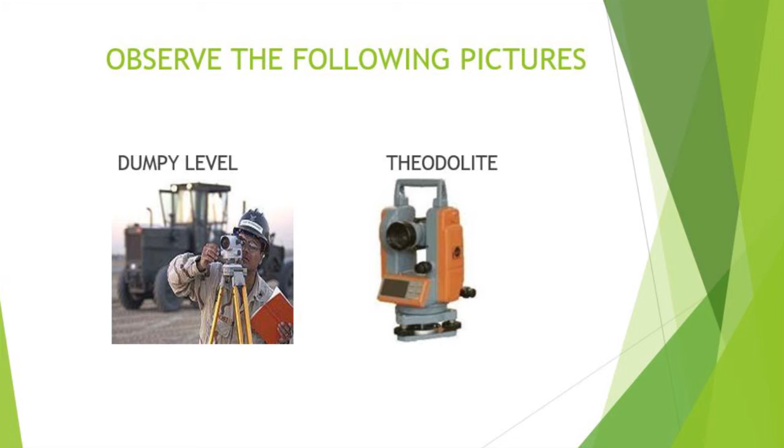Here there is a question to answer if you have observed well the picture. What have you seen on the picture? What is he doing? Can you guess the topic of today? Remember, we are in surveying instruments, but I need you to guess the topic of today according to the picture you have seen.

I give you a topic. Now the topic of today is using Dumpy level and Theodolite instruments as required in surveying operations. Remember, we are in surveying instruments, competence called operate surveying instruments. Learning unit 2: Use of surveying instruments, equipment, and tools. Learning outcome: use surveying instruments, equipment, materials, and tools.

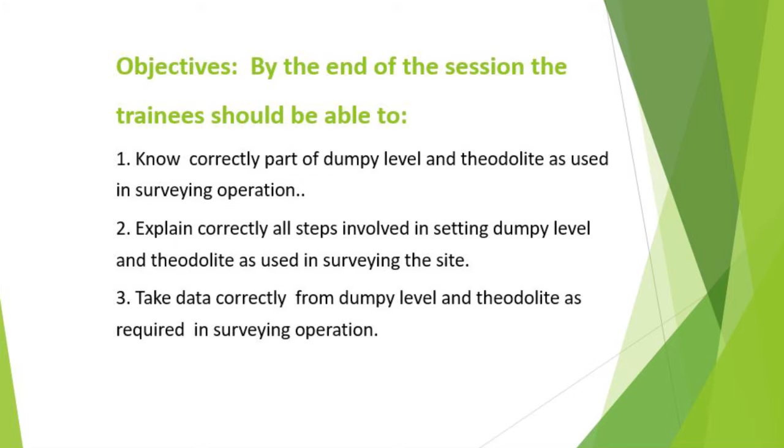Remember, in the first learning unit, we have seen more about surveying. What is surveying? We have seen that surveying is the art of determining the relative position of a point on, above, or beneath the earth's surface by means of direct or indirect measurement of distance, direction, and elevation. Remember, I have told you: distance, direction, and elevation.

Suppose that we have here an axis. This is the x-axis and the y-axis. It means on this there is a length here. This length is now a distance. And here there is what you call direction, either from here as north. So the direction here is different from the direction here.

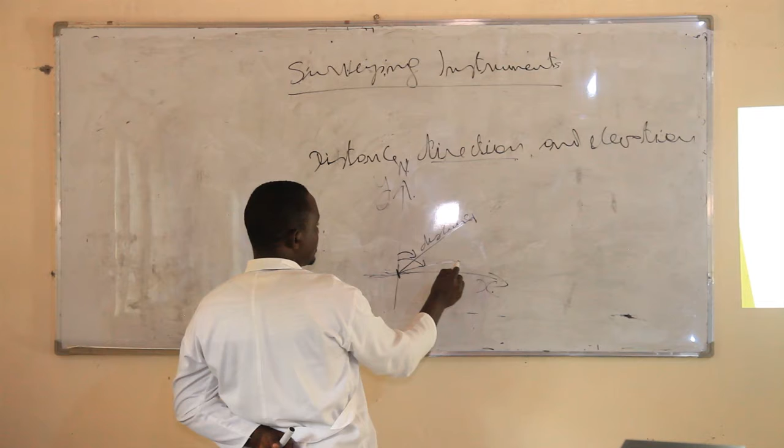It means the angle of direction, or direction of this line, is different. Either here may be 40 degrees and here can be 70. So the direction, if this is north, south, west, and east, the direction north to east of this line is different.

So now in surveying we study the distance. Suppose it is a car which travels from Butare to Kigali, in this direction and another in this direction. So it means the direction of this and this is different. So we will also need what we call elevation in surveying.

Suppose here, if you have like a box, it means here this may be elevation, which is called Z. It means here there is a 3 dimension: Z, which is elevation. Now Z, X and Y. Y is now latitude; in surveying it is considered as latitude. And X is considered as departure.

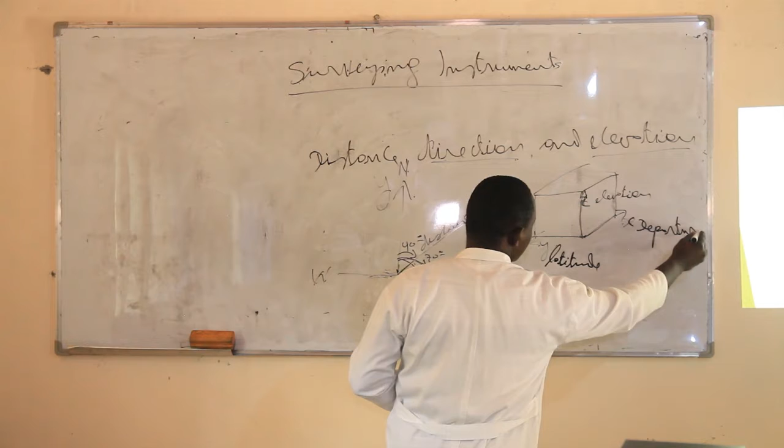It means X, Y, and Z. These are the 3 coordinates that are needed in surveying in order to gain the relative position of a point. Each point must have 3 coordinates, X, Y, and Z. Remember, in the first learning unit you have studied this. So each point has its different coordinates in order to have its position, X, Y, and Z. Remember, in surveying we studied X, Y, and Z, which is the position of a point. So in surveying we have to discover or determine all of those.

In engineering or in construction, surveying is used for preparation of maps and plans for the planning and design of the structure, as well as assuring that the construction takes place to the dimensions and tolerances required. So surveying is needed for making a plan or map in order to plan or design the structure that we construct. That is why surveying is needed. Engineering surveying also helps to determine the quantity or give sufficient data for the design of engineering work.

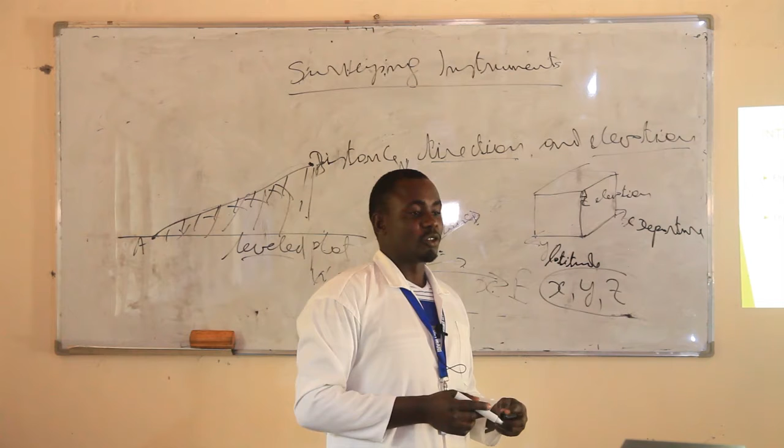So surveying is used for determining the quantity or giving sufficient data to design engineering work. Also, the data we take in surveying is used to design the structure. So you understand that surveying is essential in engineering work. Remember, our topic of today is to use the dumpy level and theodolite. Let's now see more about the dumpy level.

A dumpy level is an instrument used in surveying to provide a horizontal line of sight. When you want to sight in front, the dumpy level gives you a horizontal line of sight, not inclined up or down. So it is horizontal.

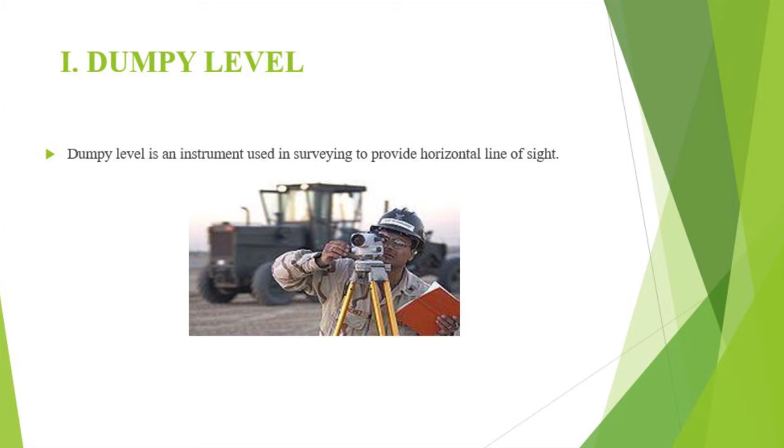A dumpy level has several parts: telescope, eyepiece, as you see there, ray shade, objective end, longitudinal bubble, focusing screw, foot screw, upper parallel plate, diaphragm adjusting screw, bubble tube adjusting screw, transverse bubble tube, and the foot plate, as shown on the figure here. You see the figure of the dumpy level. The number on each part corresponds to its name.

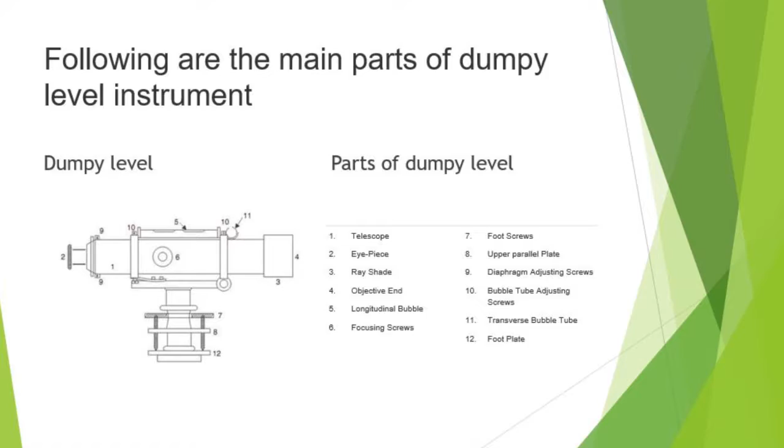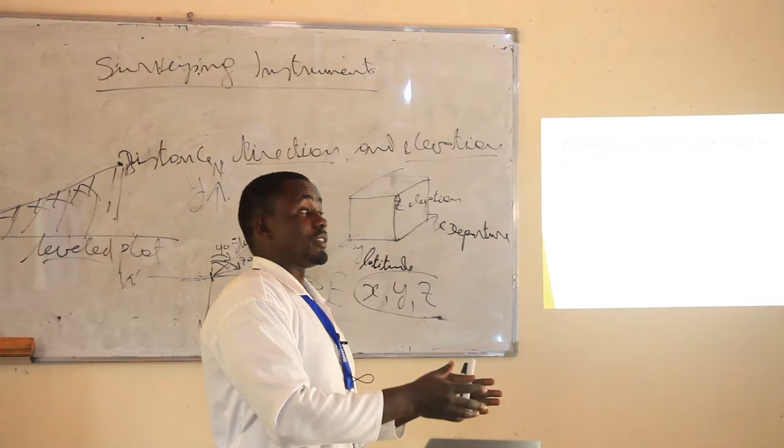So each part on the dumpy level is used in order to take data, and that data will be used for designing or for calculating the quantity, for example the quantity of soil that can be removed in excavation in order to have a leveled plot.

To conduct a dumpy level survey, the following instruments are required. You can't use a dumpy level only for taking data. There is another instrument that is required in order to take your data. First you have a dumpy level, and you will need a tripod for fixing your dumpy level. And you will also need a metric staff or English staff, also called leveling staff or leveling rod, remember in learning unit 1, for taking data.

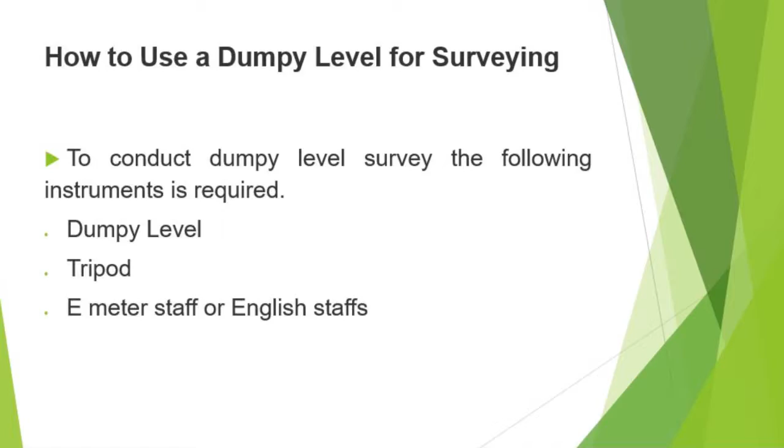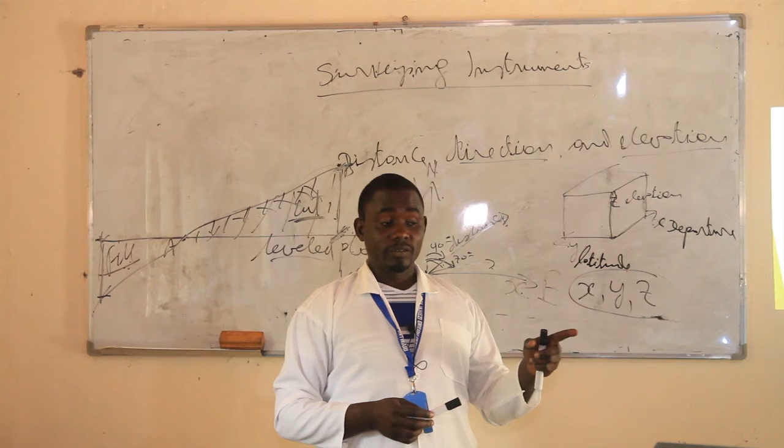Steps for setting a dumpy level. So you will need to know how to set a dumpy level. Also, the dumpy level has similar steps for setting. The steps for setting a dumpy level are similar to those for setting a theodolite. Remember, we have to know about the dumpy level and theodolite, because there are similar steps for setting them.

When you set a dumpy level, you set the tripod up near the spot you want to measure. Remember, in the first learning unit, we have seen what we call spot levels. Not only in the first learning unit, but in level 3 we have seen spot levels in building setting out. So the spot levels are the levels whose data you need to take. So you set your tripod near the spot you want to measure, not on the spot.

Then connect your device to the tripod and position it over two leveling screws. So remember, after you fix or connect your device on the tripod, you have to use the foot screws or leveling screws to level your dumpy level. Then level the device by adjusting the leveling screws, using two foot screws. Remember, in the setting out you have seen this in level 3.

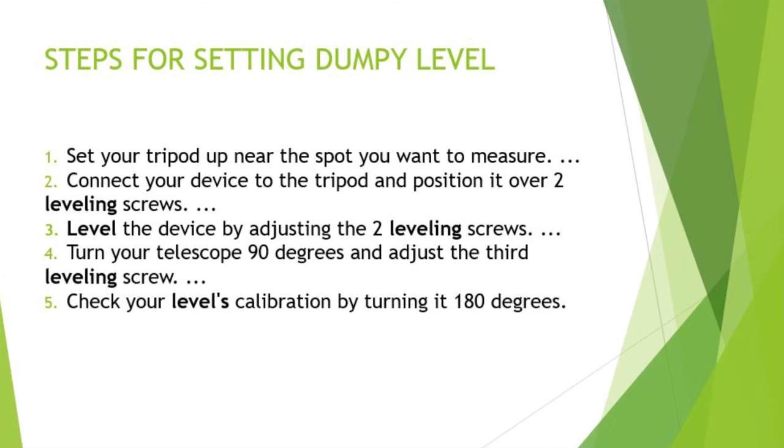Turn your telescope at 90 degrees and adjust the third leveling screw, or foot screw. Remember, each instrument has 3 foot screws. Now check the level's calibration by turning it at 180 degrees. If you have a level, you have to check. But remember, on the theodolite there is a 90 degrees; you have to turn to the 90 degrees. Now you have finished setting your dumpy level or theodolite.

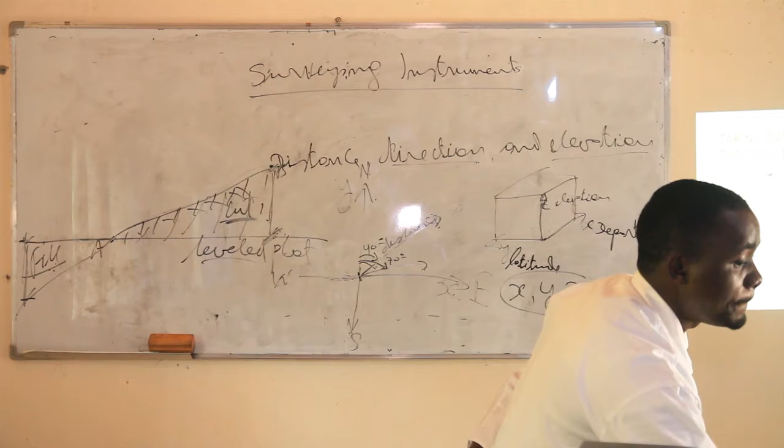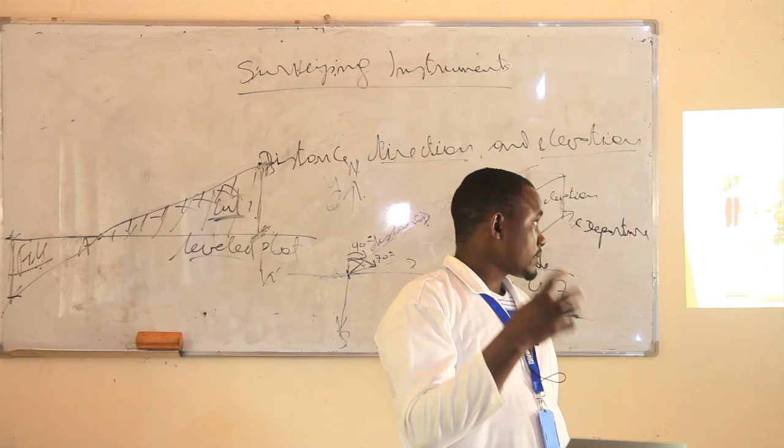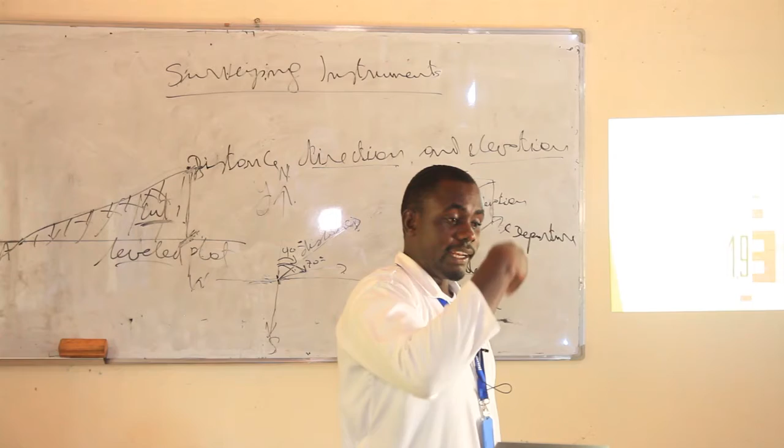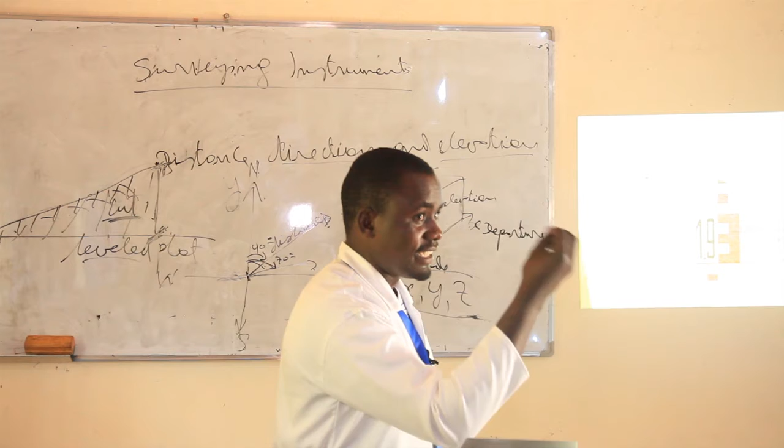If you know how to take data from the leveling staff: remember, on the leveling staff we need to take 3 readings. Inside the telescope there are 3 stadia hairs: upper, middle, and lower. The middle stadia hair gives the middle reading, the upper gives the upper reading, and the lower gives the lower reading, as you have seen in level 3 in building setting out.

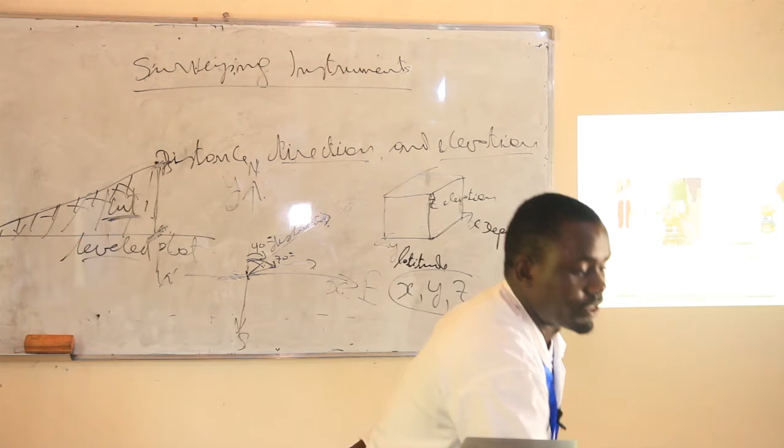So first, remember, in the steps of taking data, you set your tripod near the spot level as you see there. You have to set it near the spot that you need. But first you have to know one spot which has a known elevation.

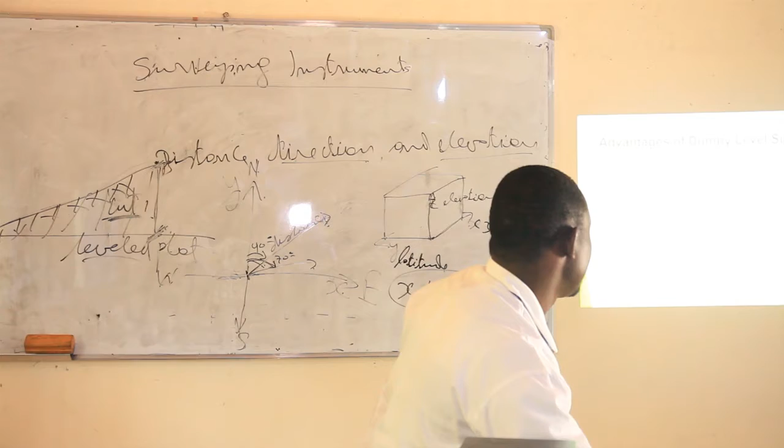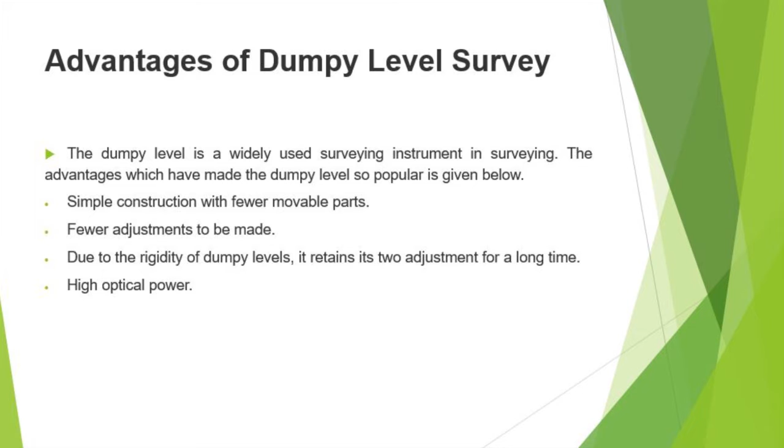So here there is the advantage of Dumpy level in surveying. Dumpy level is a widely used instrument in surveying. The advantages which have made Dumpy level so popular are given below. Simple construction with few movable parts. It has few movable parts, few adjustments, and due to its rigidity, it retains its adjustment for a long time. And high optical power. This optical power will help you to take data.

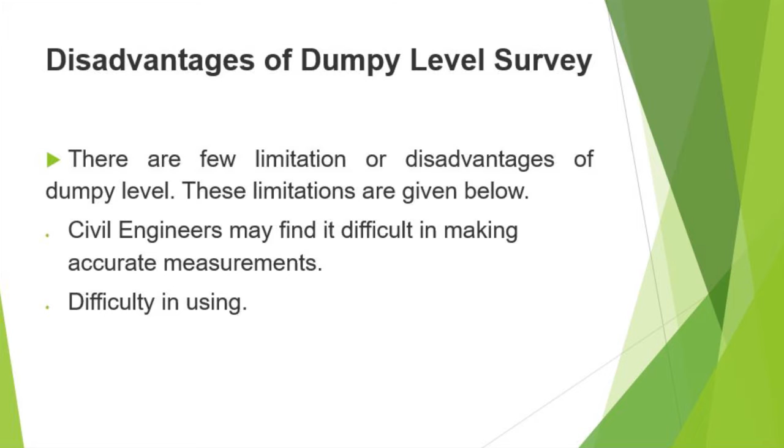There are a few limitations or disadvantages of Dumpy level. Civil engineers may find it difficult in making accurate measurements, difficult in using. Suppose when we have an elevated site, to look up or down is very difficult. It is because it is only horizontal.

So remember we have Dumpy level and Theodolite. So now this is a Theodolite. Theodolite is a precise instrument used for measuring angles both horizontally and vertically. Remember, in Dumpy level it is only horizontally, not vertically. Theodolite can rotate along its horizontal axis as well as the vertical axis. But Dumpy level is only horizontal axis. The Theodolite is an instrument in surveying to measure horizontal and vertical angles. It displays vertical and horizontal angles, but Dumpy level displays only horizontal angle.

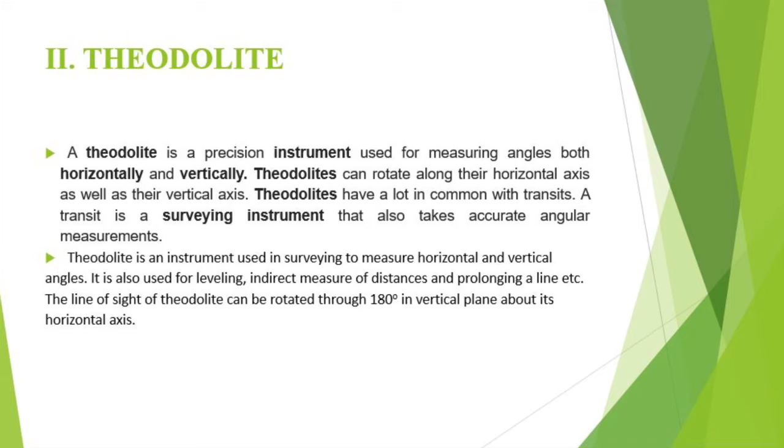You see here parts of theodolite. Here there is the targeting sight. When you want to sight, you target on that part. Also, objective lens. Display, LCD display, it means it is a screen. Operating key. Circular vial. Tripod, where we put the tripod. Base plate. There is also handle, handle screw, center mark and the vertical plate. Horizontal fine motion, horizontal clamp. When you want to rotate horizontally, you use this. Tubular vial, it is where we get a bubble.

Also, you see here focusing ring. When you want to focus, you focus here. Optical plummet. Communication port, leveling screw, battery case, because theodolite uses battery. Eyepiece, telescope fine motion, telescope clamp. When you want to rotate the telescope down or up, depression or elevation, you will use telescope fine motion or telescope clamp. Tribrach locking lever. These are the parts of theodolite.

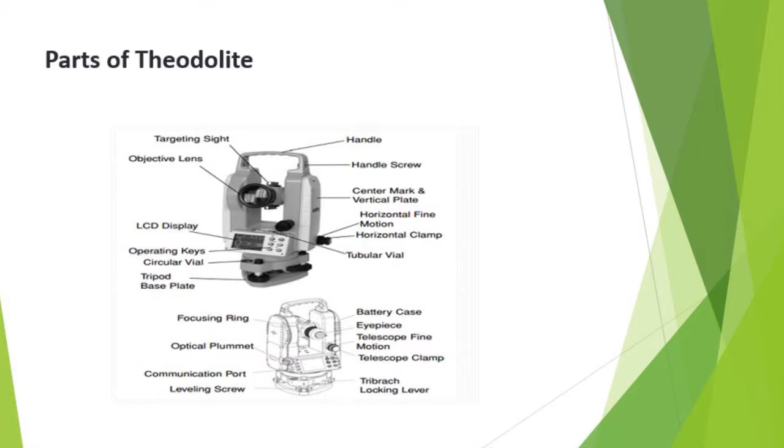Then theodolite also has applications in surveying. Theodolite is a good instrument that we use in surveying. Prolonging a survey line: when you need to prolong it, you will use theodolite. Point on line: if you want to put a point on a line, you can use theodolite. Laying off horizontal angles, because it measures horizontal and vertical angles. Determining the difference in elevation, needed in masonry. In road construction you can use theodolite. So theodolite has several applications in surveying.

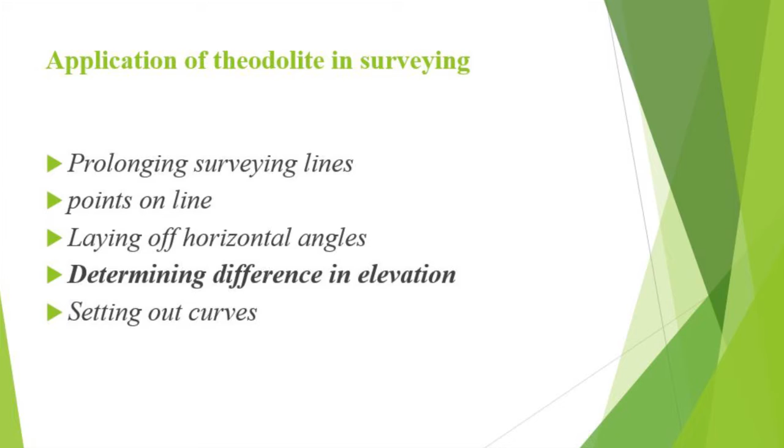So you have seen more about Dumpy level and theodolite, but next you will see calculation of elevation and distance from the data taken with Dumpy level and theodolite. This is the end of this session. But remember, after this session, you have to go in practice. So let's now go to the practice.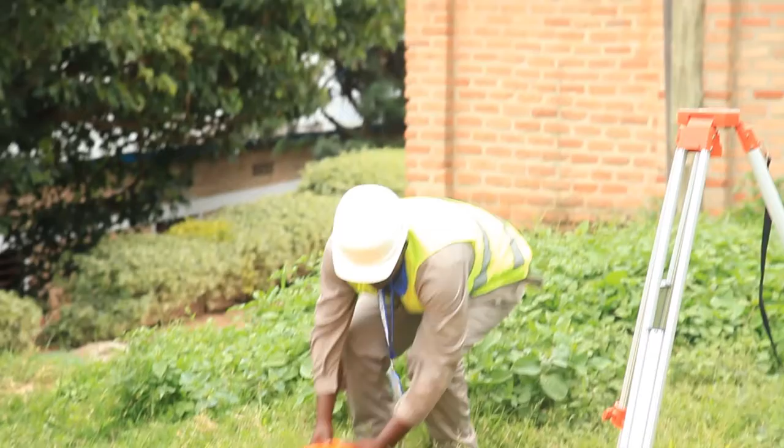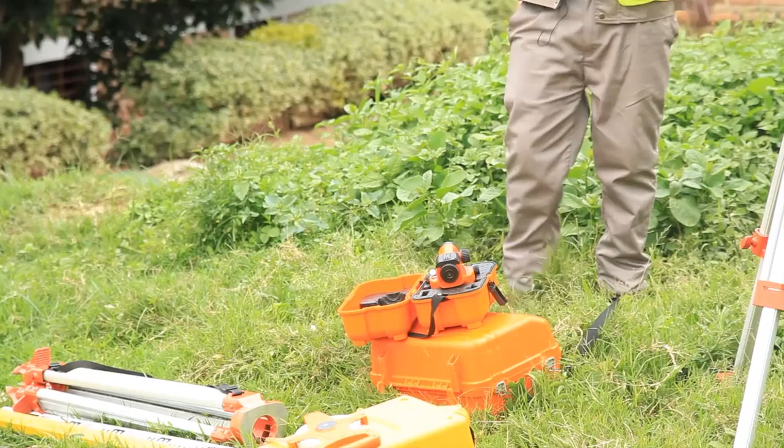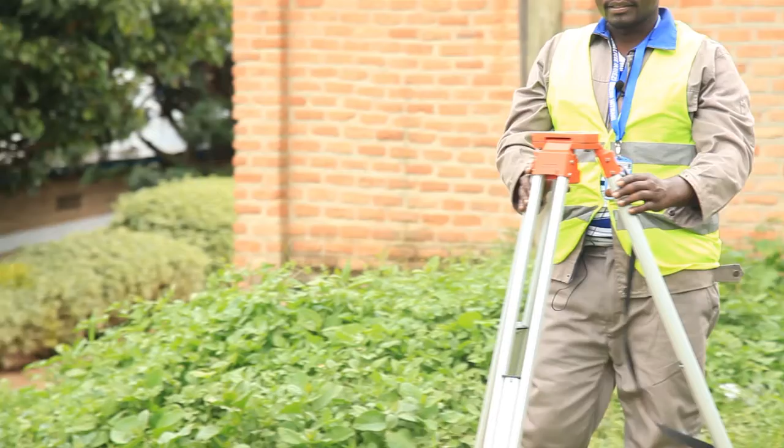So now we are in the practice of surveying. Remember, in the classroom we have seen the topic use of Dumpy level and theodolite in surveying operations. We have here several tools, equipment, and materials used in surveying. Let's start with a Dumpy level. This is a Dumpy level, fixed on the tripod, as you have seen in class. This tripod is where we fix the Dumpy level and the theodolite when taking surveying data. Surveying data is used for calculating quantities and in the design of dams, houses, bridges and roads. So let's now start with how to use a Dumpy level.

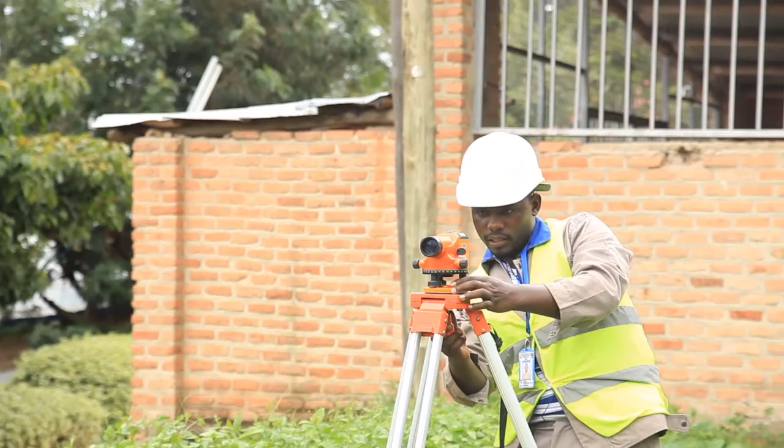You have to take a Dumpy level first from the box and then fix it on the tripod. Remember, firstly, the tripod must be well fixed in the ground, as you have seen also in level 3 in building setting out. The tripod must be fixed in the ground with its screws. Check it and then fix the Dumpy level.

After fixing the Dumpy level, you have to level your Dumpy level using the foot screws. Here there is a bubble which must be centered. You have to set it in the center simply using the foot screws. It is very simple when you are familiar with it. You screw on. Now it is set in the center.

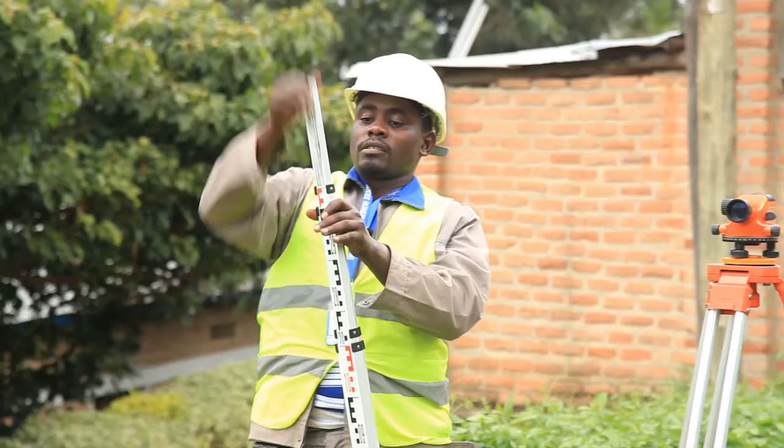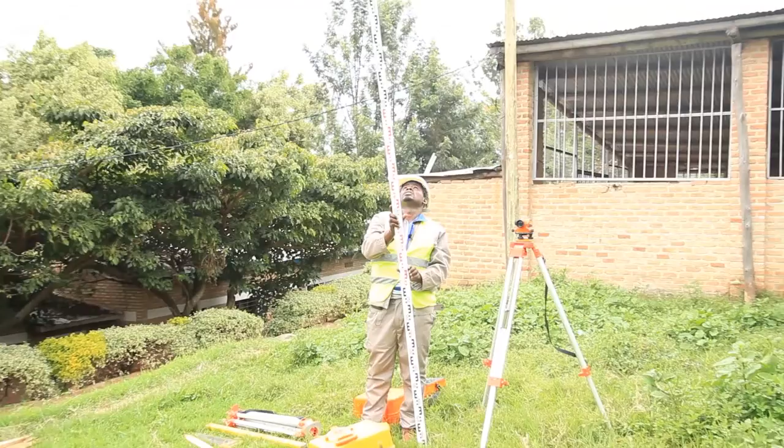Remember, the Dumpy level has a horizontal line of sight. You have to take the data from the Dumpy level with the help of a leveling staff like this. This is a leveling staff of 5 meters. Yes, it is 5 meters: 1, 2, 3, 4, 5.

Remember, when you want to read on the staff, here is 0. This is 1, 2, 3, 4, 5, 6, 7, 8, 9, 10. It means it is graduated in decimeters, because 10 graduations is a meter. First, let us see how to read the staff reading. This is 0, 1, 2, in decimeters. Then you read 0.1, 0.2 until 1. It means here is 1 decimeter.

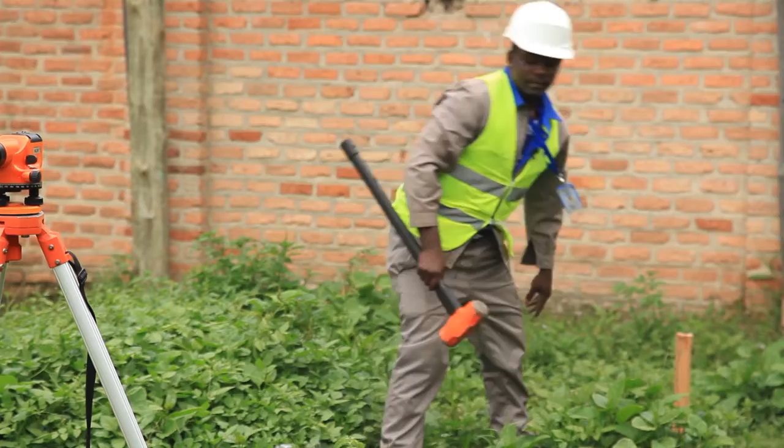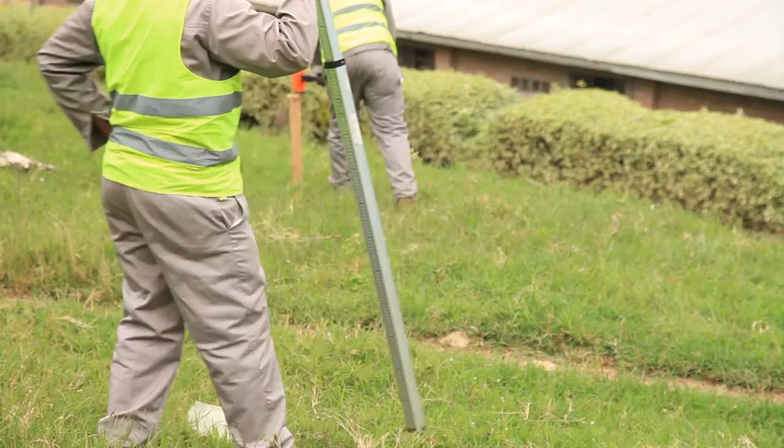Then you have to use this with the help of another person, who will set the staff on the spot level. Let us now consider this point as a benchmark. Then you need the elevation of that point. So this point is a known elevation point. It means it has an elevation which is known.

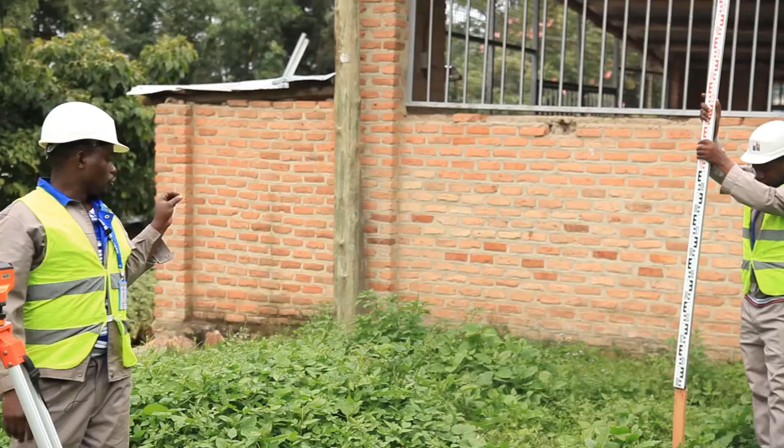Now you have to determine the elevation of that point. The elevation of this point is known, for example 100. Now let's take the backsight reading here. So you take this point as a reference point in order to determine the elevation of the other point.

Let's now focus on the staff. You focus on the staff until you read the 3 stadia hairs. Yes, here I see the 3 stadia hairs. Now I can start to read. For example, here I see 12 in the middle, 12.2 in the middle.

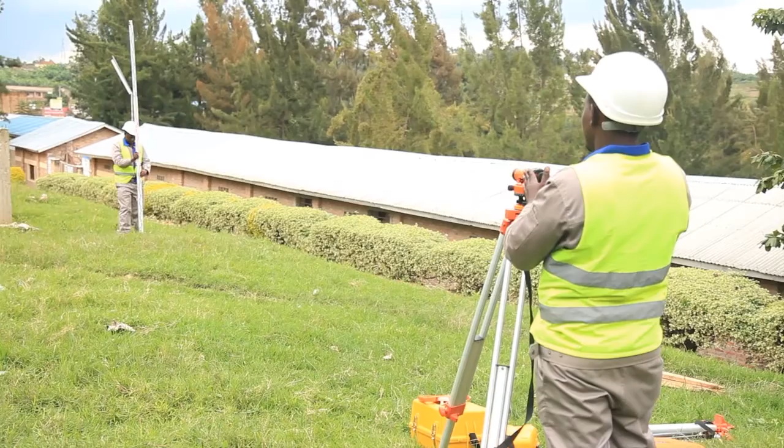After taking the backsight, you have to go to the other spot level. Remember, you have seen here 12.2. Now also you have to focus on the staff reading. Focus first. Then I have sighted, I search the staff reading. Now I have seen it. Here it is 18.2. Remember here it is 12.2.

Here is 18.2. It means the difference between here and here is 6 decimeters. If we take 12.2 minus 18.2, you will get minus 6. It means here it is lower. Peg B is lower than peg A by 6 decimeters, that is 0.6 meters. This is the difference in elevation between those points. To make it level, you will excavate 6 decimeters in order to have a leveled ground. So let's now finish with the dumpy level.

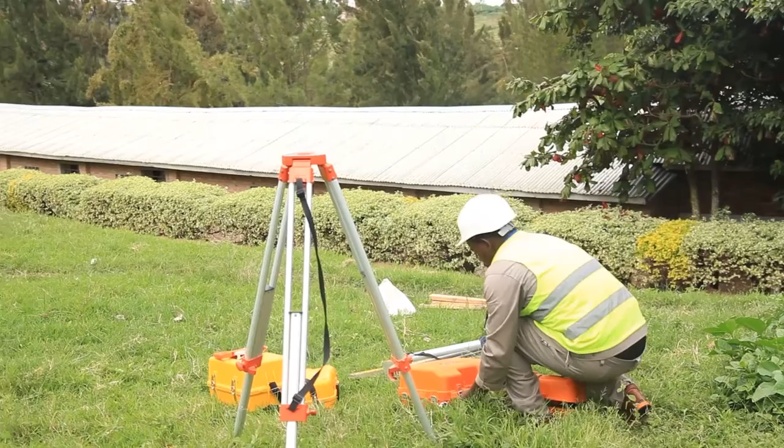After the dumpy level, remember we have to use a theodolite. This is a theodolite. The theodolite must also be set on the tripod in order to use it well.

This is a theodolite. Now, theodolite is this objective or telescope. This telescope is set at 180. Then this is vertical clamp. It means you see there, if you close this, now it is fixed. It is now fixed. Then you open like this. Now it is moved. Also, you have also horizontal movement. You have to open there.

See? The difference between dumpy level and theodolite is vertical movement of the telescope. On the dumpy level it doesn't move. It remains horizontal. So, if you need to use theodolite, you will need first to put the instrument where you need to start. This is optical plummet. It has optical plummet. You have to see where it is. You open, you can see where there is a starting point. This was an introduction. Let's now start how to use a theodolite.

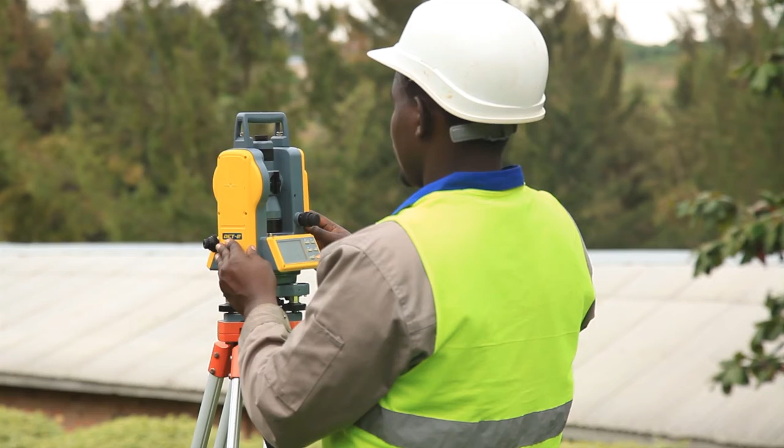You open first theodolite like this. Now in the screen you see the vertical angle and the horizontal angle. Theodolite, like a dumpy level, you must first level it using a foot screw. Then the bubble must be centered. Now the bubble is centered, and then you have to level the upper bubble like this. Then this is the vertical angle, horizontal angle. Then you must set 0 set in order to have a starting point. If you start there, now it is a 0 set.

Horizontally, remember the circle has 360 degrees. If you set here 0 set, it means this is 0 or starting point of horizontal movement. This is now a 0 set. Then, if you rotate like this, you see that is clockwise. Then the angle is now increasing. If we rotate counterclockwise, now the angle is decreasing. So this is about the horizontal angle.

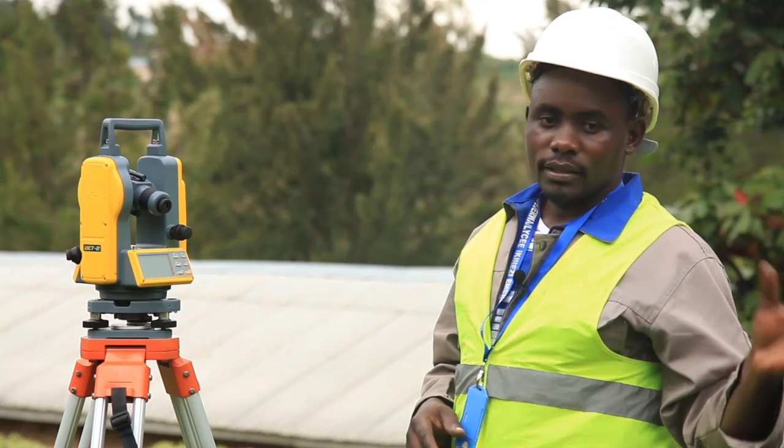So thanks. The next session will be about how to calculate the data, or how to use the data in order to have elevation from dumpy level and theodolite.